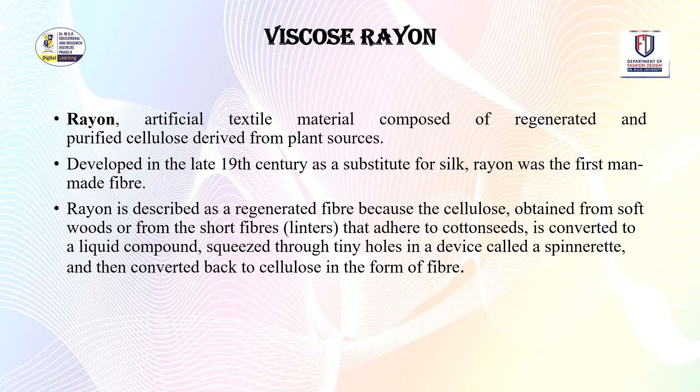Properties of viscose rayon. Physical properties: moisture absorption. It absorbs more moisture than cotton. Tensile strength. The tensile strength of the fiber is greater when the fiber is dry as compared to its wet state. Action of heat and light. At 300 degrees Fahrenheit or more, viscose rayon loses its strength and begins to decompose at 350 to 400 degrees Fahrenheit. Prolonged exposure to sunlight also weakens the fiber due to the moisture and the ultraviolet light of the sunlight.

Absorbency. Rayon is the most absorbent of all cellulosic fibers, even more so than cotton or linen. Rayon absorbs perspiration and allows it to evaporate away from the skin, which makes it an excellent summer fabric. Abrasion resistance. Its abrasion resistance is very low due to the inelasticity of the rayon. It is easily damaged by scraping.

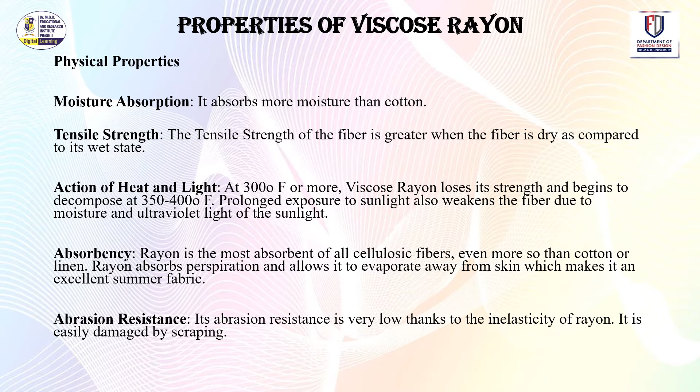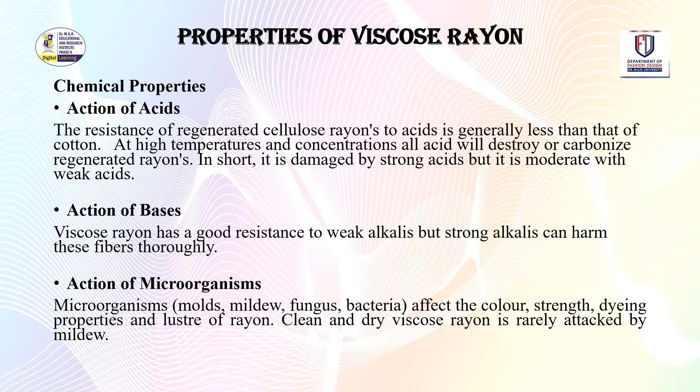Chemical properties. Action of acids. The resistance of regenerated cellulose rayon to acids is generally less than that of cotton. At high temperature and concentration, all acids will destroy or carbonize regenerated rayons. In short, it is damaged by strong acid, but it is moderate with weak acid. Action of bases. Viscose rayon has a good resistance to weak alkalis, but strong alkalis can harm these fibers thoroughly. Action of microorganisms. Microorganisms affect the color, strength, dyeing properties, and luster of rayon. Clean and dry viscose rayon is rarely attacked by mildews.

Uses. Rayon typically has an elevated luster quality, giving it a brilliant gloss. Mainly, rayon fibers are used in apparel industries such as aloha shirts, blouses, dresses, jackets, lingerie, scarves, suits, ties, hats, and socks. Some rayon fibers are used as filling in Zippo lighters, furnishings including bedspreads, bed sheets, blankets, window covers, upholsteries, and slip covers. For industrial purposes such as medical surgery products, non-woven items, tire cords, and some other uses like diapers, towels, feminine hygiene products.

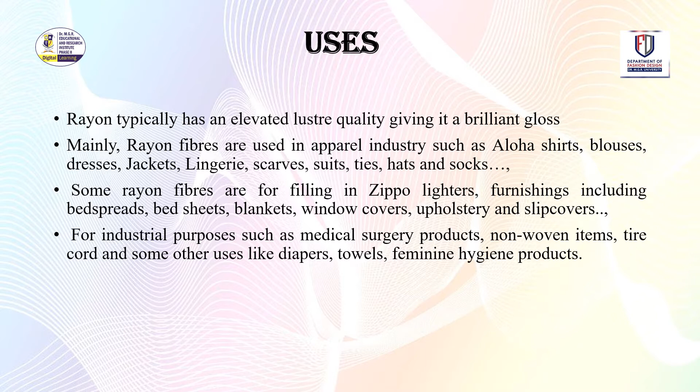Polyester. It is also a man-made fiber. Polyester is very durable and resistant to many chemicals. This is a popular fabric in fashion industries as it is resistant to shrinking and stretching. It is also resistant to wrinkling and abrasion. The fibers used to create polyesters are very strong yet lightweight. The fibers are easily dyed. It retains its shape very well. Polyester fabric is easy to look after and it can be washed and dried at home. It is a quick drying fabric, so a popular choice for outdoor clothing.

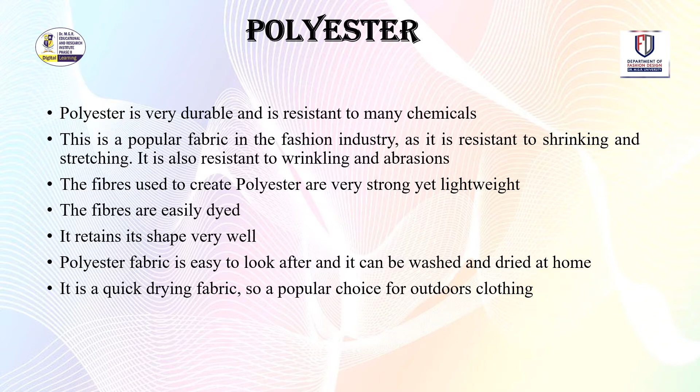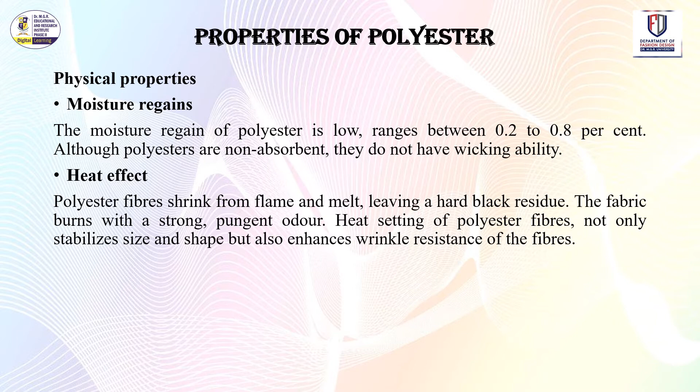Physical properties. Moisture regain of polyester is low, ranging between 0.2 to 0.8%. Although polyesters are non-absorbent, they do not have any wicking ability. Heat effect. Polyester fibers shrink from flame and melt, leaving a hard black residue. The fabric burns with a strong pungent odor. Heat setting of polyester fibers not only stabilizes the size and shape but also enhances the wrinkle resistance of the fibers.

Chemical properties. Effect of alkalis. Polyester fibers have good resistance to weak alkalis at high temperature. It exhibits only moderate resistance to strong alkalis at room temperature and is degraded at elevated temperatures. Effect of acid. Weak acids even at the boiling point have no effect on polyester fibers unless the fibers are exposed for several days. Polyester fibers have good resistance to strong acid at room temperature.

Miscellaneous properties. Polyester fibers exhibit good resistance to sunlight and also resist abrasion very well. Soap, synthetic detergents and other laundry aids do not damage them. It absorbs oily materials easily and holds the oil tenaciously.

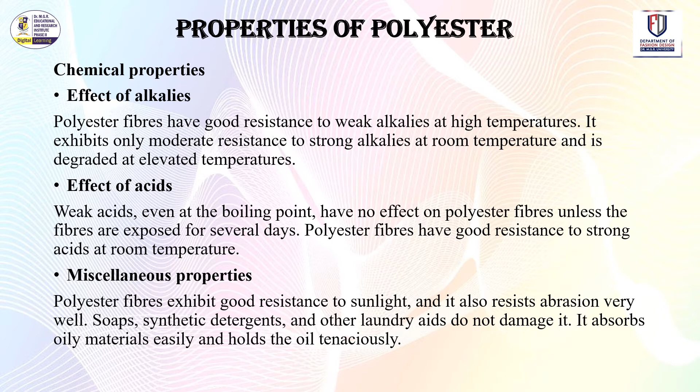Uses of polyester. Polyesters are widely used in clothing fabrics. Polyester is also employed in the manufacture of many home furnishing materials such as bed sheets, curtains, blankets, and pillowcases. Polyester is also used in upholstery furniture.

Polyester is known to play a vital role in the manufacture of certain types of car tire reinforcements. The safety belts that are used in automobiles in order to protect the passengers are often made up of polyesters along with other components.

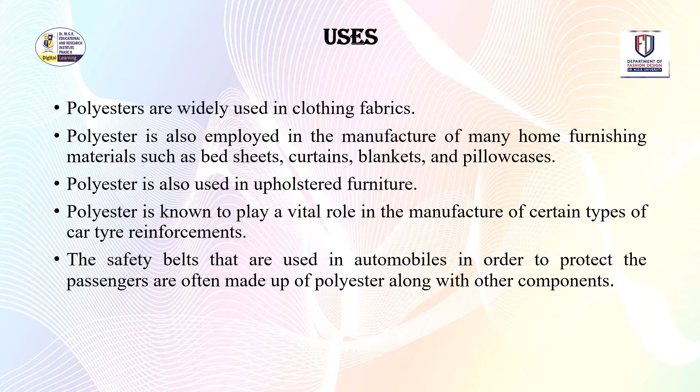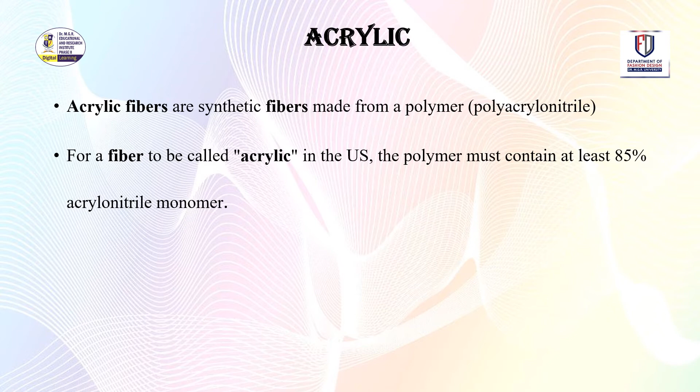Acrylic. Acrylic fibers are synthetic fibers made from polymers polyacrylonitrile. For a fiber to be called acrylic in US, the polymer must contain at least 85% of acrylonitrile monomer. Properties of acrylic. Physical properties. Length. The length of acrylic fiber can be controlled. That means it may be in filament or staple form. Fineness of this fiber is also controllable.

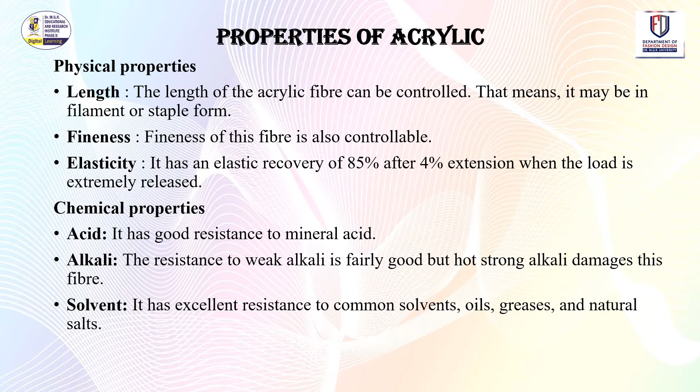Elasticity. It has an elastic recovery of 85% after 4% extension when the load is released. Chemical properties. Acid. It has good resistance to mineral acid. Alkali. The resistance to weak alkali is fairly good, but hot strong alkali damages this fiber. Solvent. It has excellent resistance to common solvents, oils, grease and natural salts.

Effect of heat and sunlight: this fiber has very good thermal stability. Safe ironing temperature is at 160 degrees Celsius. At 230 to 235 degrees Celsius, acrylic sticks with iron, that is, melting occurs. High temperature may sometimes cause yellowing of these fibers. Effect of biological agents. This fiber is unaffected by mildews, molds, larvae and insects.

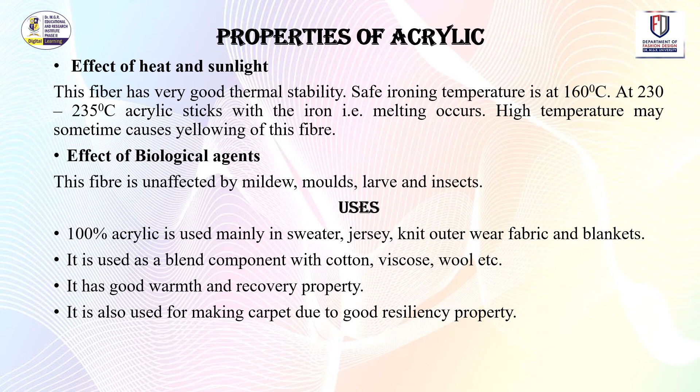Uses of acrylic. 100% acrylic is used mainly in sweaters, jersey, knit outerwears, fabric and blankets. It is used as a blend component with cotton, viscose, wool, etc. It has good warmth and recovery property. It is also used for making carpets due to good resiliency property.

Nylon. Nylon is the name of a family of synthetic polymers that are commonly used to make varieties of different types of apparel and consumer goods. Unlike other organic or semi-synthetic fibers, nylon fibers are entirely synthetic, which means that they have no basis in organic materials. Properties. Nylon possesses many properties that make it a very useful fiber in many applications. It is very strong and elastic.

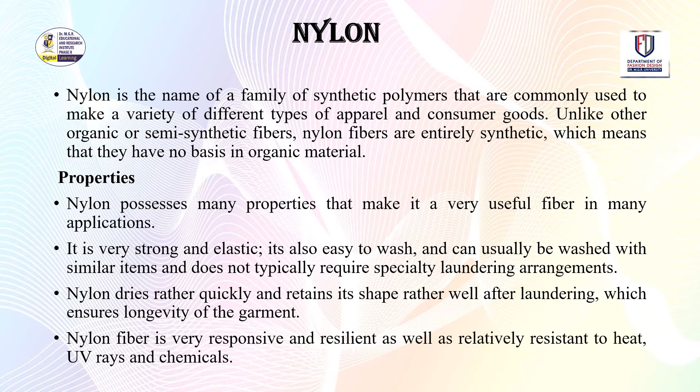It is also easy to wash and can usually be washed with similar items and does not typically require specialty laundering arrangements. Nylon dries rather quickly and retains its shape rather well after laundering, which ensures longevity of the garment. Nylon fiber is very responsive and resilient as well as relatively resistant to heat, UV rays and chemicals.

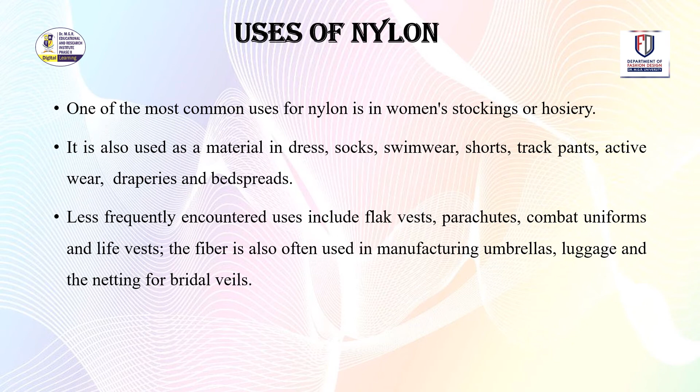Uses of nylon. One of the most common uses of nylon is in women's stockings and hosieries. It is also used as a material in dress, socks, swimwear, shorts, track pants, activewears, draperies and bedspread. Less frequently encountered uses include flak vest, parachute, combat uniforms, and life vest. The fiber is also often used in manufacturing umbrellas, luggage, and the netting for bridal veils.

Glass fiber. A fiberglass is a form of fiber reinforced plastic where glass fiber is the reinforcement. This is the reason perhaps why fiberglass is also known as a glass reinforced plastic or glass fiber reinforced plastic. The glass fiber is usually flattened into a sheet randomly arranged or woven into a fabric. According to the use of the fiberglass, the glass fibers can be made of different types of glass.

Fiberglass is lightweight, strong, and less brittle. The best part of fiberglass is its ability to get molded into various complex shapes. This pretty much explains why fiberglass is widely used in bathtubs, boats, aircrafts, roofing, and other applications.

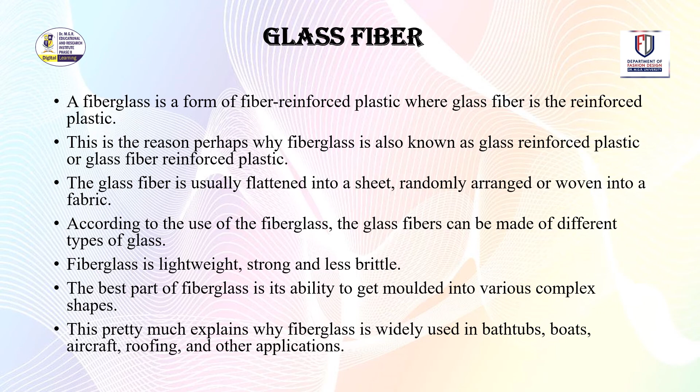Spandex. Man-made fibers are gaining popularity compared to the natural fibers in recent times. Spandex is a lightweight, soft, smooth synthetic fiber which has unique elasticity. Due to its elastic property, it is used in making stretchable clothing. It is also known as elastane in Europe and many other parts of the world.

Spandex is made of synthetic polymers called polyurethane which has extraordinary stretchability. The long chains of polymers are produced by reacting polyester with diisocyanate, which contains at least 85% of polyurethane. Spandex is strong, durable and was first invented at DuPont Laboratory in 1959 in Virginia.

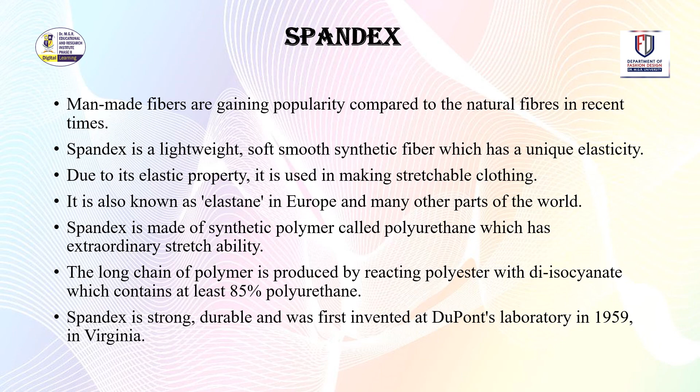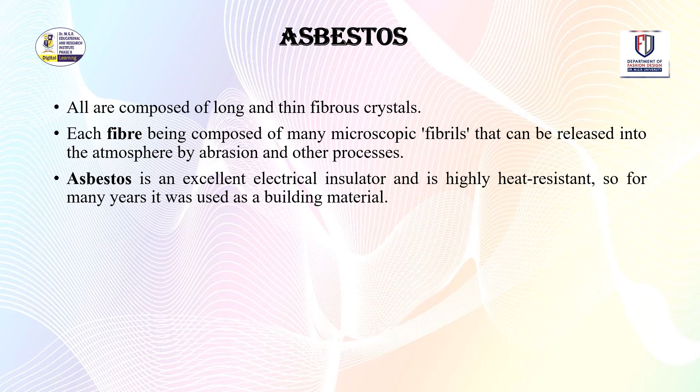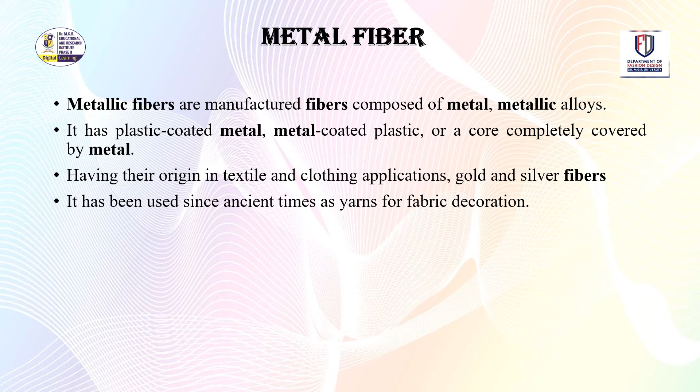Metal fiber. Metallic fibers are manufactured fibers composed of metallic alloys. It has plastic coated metals, metal coated plastics, or a core completely covered by metal, having their origin in textiles and clothing applications, gold and silver fibers. It has been used since ancient times as yarns for fabric decoration. Thank you.